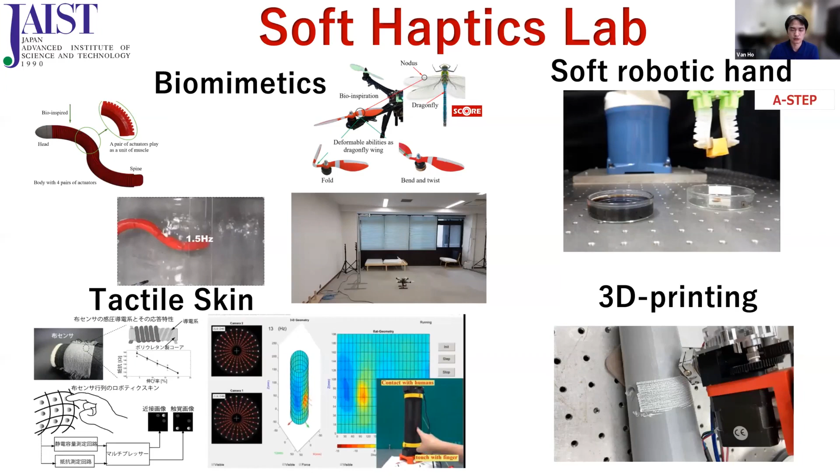And today, my focus will be on the morphological design of robotic hands, as you can see here. Regarding the design of robotic hands, up to now there are so many designs, which are not only efficient but also really interesting in terms of mechanical ideologies. So in our laboratory, we try to build on softness and then apply morphological design.

When you're talking about morphology, it should be related to the geometrical shape and also the measurement, right? But also when dealing with materials, you need to care about mechanical properties like Young's modulus, softness, Poisson's ratio, and so on. One more point that we also focus on is tribology, which focuses on the contact interface between the objects and the hand.

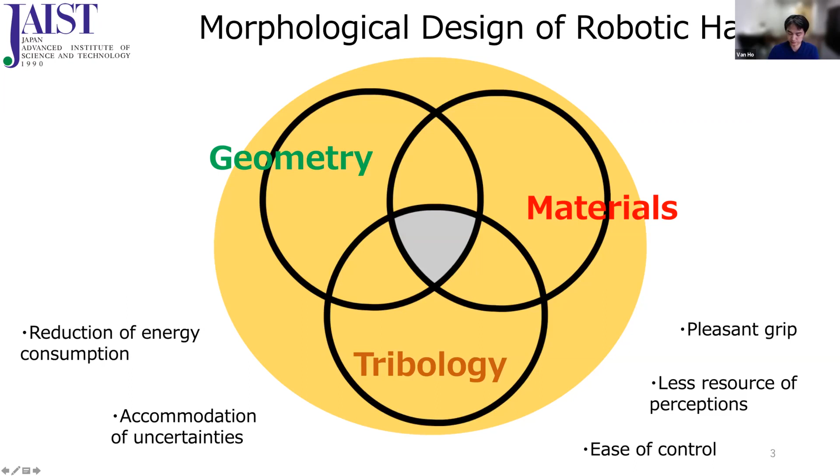So based on this ideology, our aim is to reduce the energy consumption in grasping and accommodate uncertainties without doing so much learning. We also want to generate a pleasant grip on the objects, using as few perception resources as possible. And finally, hopefully we can accomplish grasps with simple control regimes. So first, I will take a little time talking about the geometry and the material.

So how we use the morphology to design a robotic hand, and then I will focus on the tribology with the grasping of wet objects. So actually, even before the emergence of soft robotics, me and my previous supervisor, Professor Hirai, and his group were working quite a lot on how we can utilize the softness and also the shape of the fingertip for handling objects.

So here we apply a hemispherical fingertip like this. So what is special about this one? You can look into the simulation done by one of my previous colleagues in Hirai lab. You can see here, even if you have only a one DOF finger, with the softness and the round shape of the fingertip, you can change the posture of the grasped objects without any difficult effort.

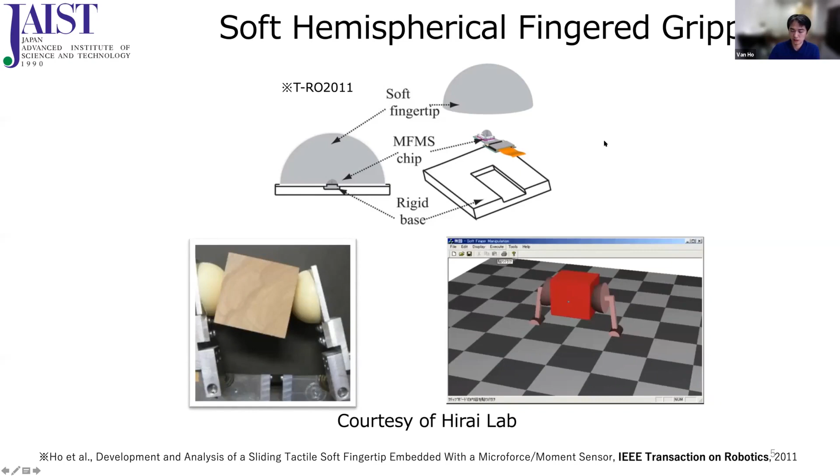So here in this research, we try to create some kind of tactile sensing by using a very small MEMS scale sensor like this. And this can detect the texture, slippage, and also the contact force as well. We also apply some kind of mechanical phenomenon into the design of the finger hand. For example, the pre-stretch. I believe you already heard about that.

So the idea is if you have a soft substrate and a quite stiff film, and before attaching one to each other, you give a pre-stress to the substrate, then after you attach the film, you can create some kind of curvature like this. If you apply an external force to this tip, there will be some stored energy that reacts to that.

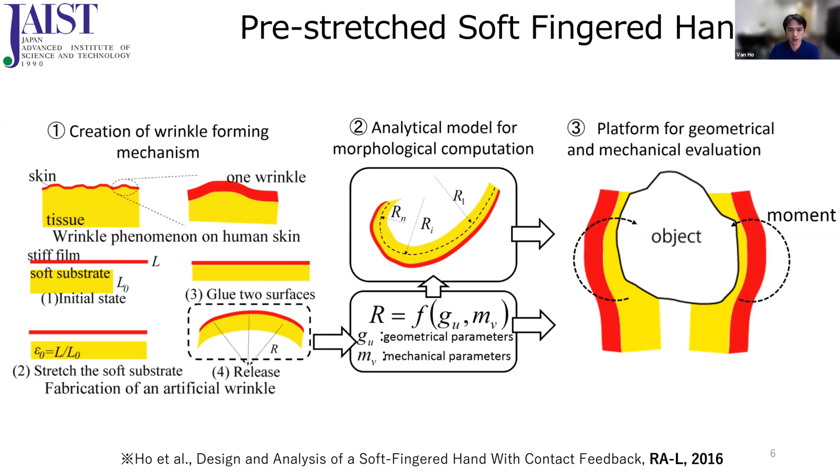So if you have some kind of morphological design for this structure, hopefully you can create fingers like this. And if you have an object in between, you don't need to give any kind of energy, because the stored energy will be converted to the grip force, so you can grip the object without consuming energy.

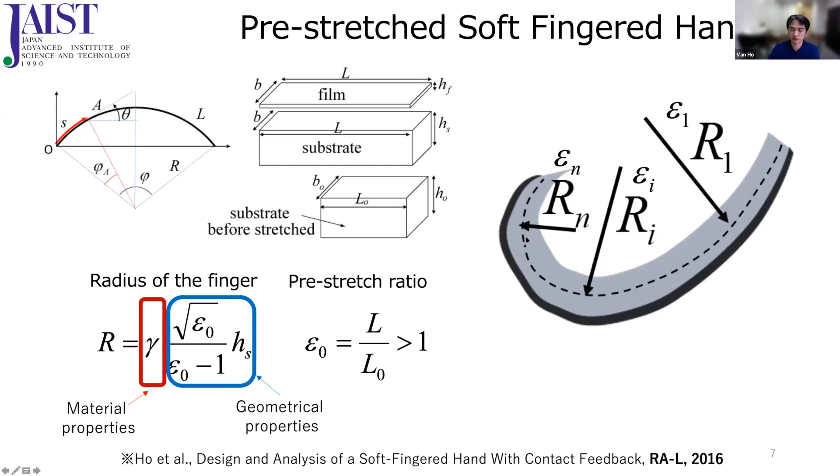And the other one is, here we use the idea of morphological design so that we can choose the curvatures of the fingertips by varying some material properties and the geometry properties like this. So during one setup, you can expect to create a human finger-like shape with different curvature along the finger, and also different levels of stored energy.

So based on this, we created a robot hand with soft fingers with pre-stored energy like this. We use a tendon and pulley only to open and release the fingertips. If you look into the consumed energy, you only consume energy when you open and release the finger. Once the object is within the fingers, you can manipulate without any further energy consumption. And because the finger is soft and not so constrained, you can grasp a wide range of objects like this.

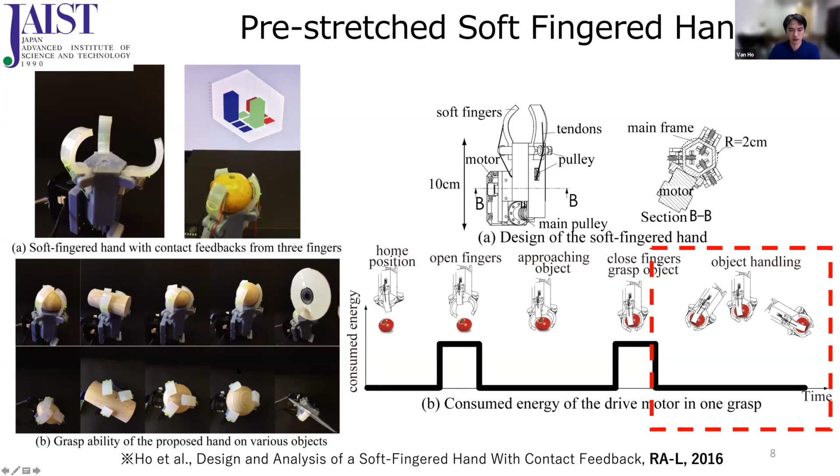We also try to give it tactile sensing by using our developed fabric sensor like this. So without using much of a learning approach, we can actually discriminate what kind of food objects the robot grabs based on measuring the capacitance generated through the fabric sensor. So with this simple design, you can save energy for grasping but also increase the dexterity of the grasp ability of the fingers.

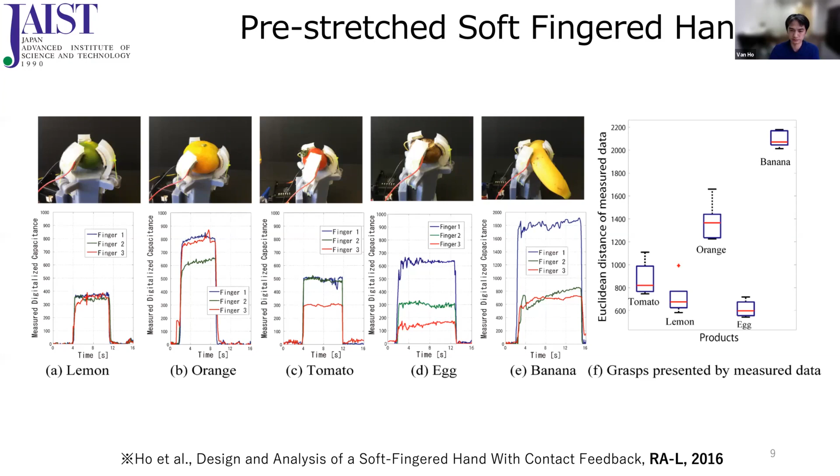So another kind of attempt is what I call grasping by wrapping. It's something similar to caging in grasping, but it's more than that, because if you can wrap the object entirely, you can expect to increase the graspability of your finger, of your hand.

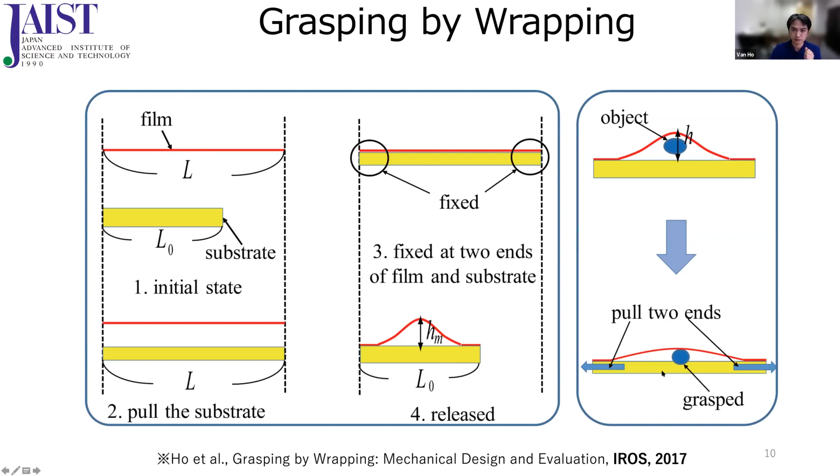So we also test the morphology of the curved film like this, based on the width of the hand. And we found that the length, the height of the curve shape is actually quite proportional to the width of the hand. So you can imagine that if you can control the width of the hand, you can actually change the grasp region of the hand.

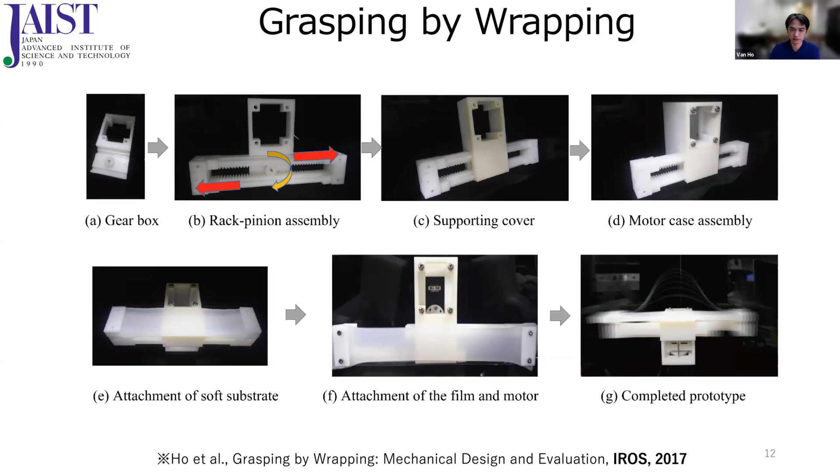So we use a very simple rack-pinion for this one. You can use one motor, and then you can create quite smoothly the shape of the film like that. Of course, you can use another kind of actuation, but this is the case. And you can see that if the object goes in between, you can simply grasp the object without so much complicated control and algorithm.

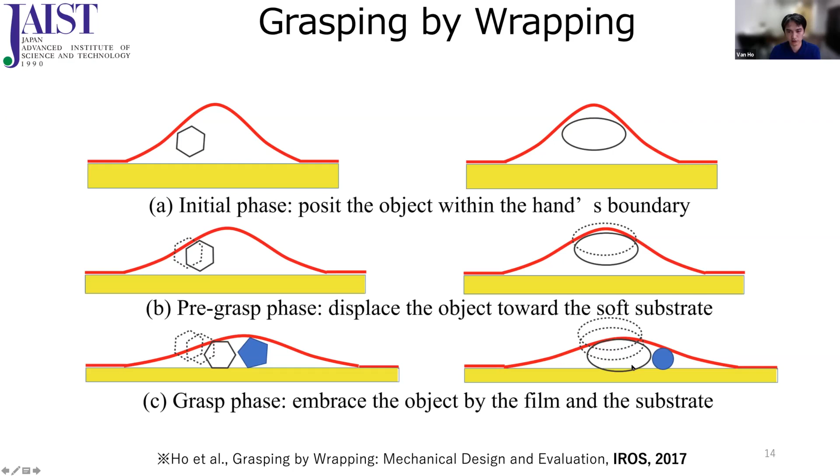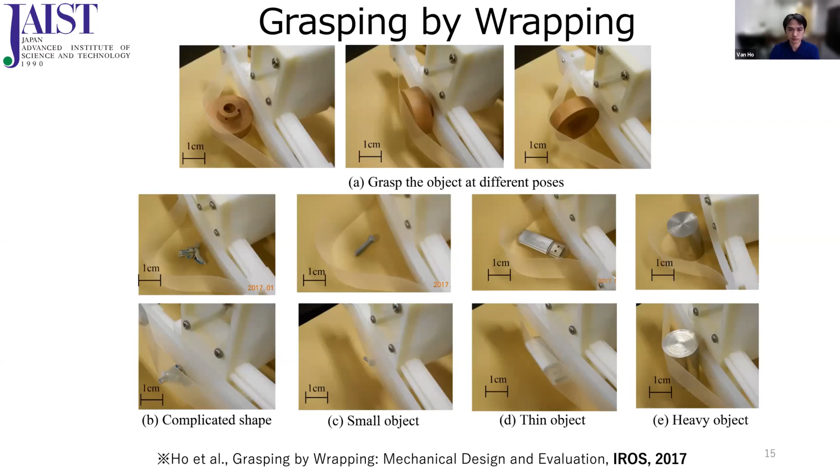And even if you have one or more, 2 or 3 objects, if they fall into this region, you can grasp the objects. So this is how the hand can grasp a variety of objects without so much attempt of control.

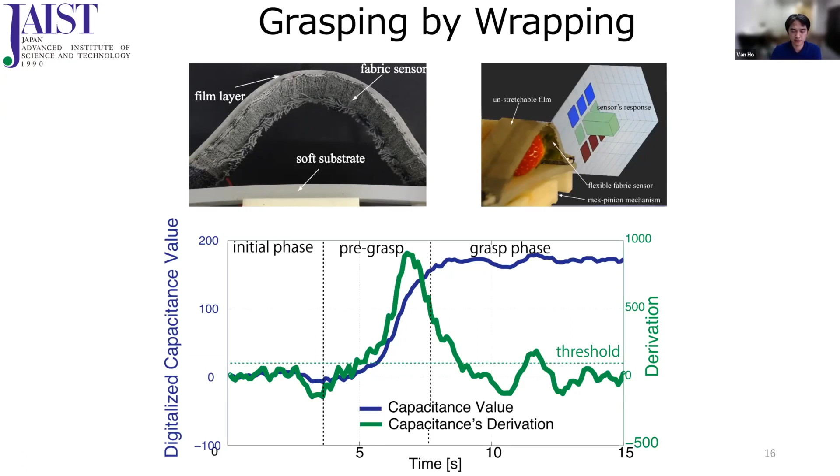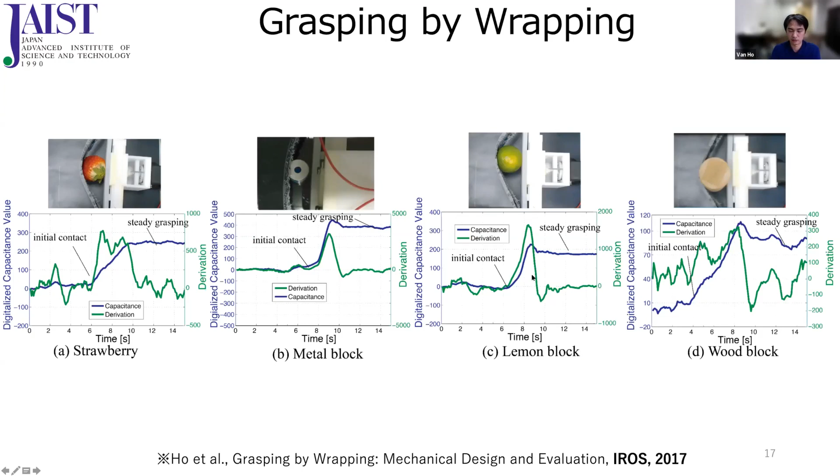And also, we try to give some kind of sensing to this hand by using a fabric sensor like this. And we find that the initial phase, the pre-grasp and grasp phases are quite different from each other. So we can actually discriminate the many phases of grasp by using the measurement of the capacitance of the fabric sensor. For example, we have many kinds of fragile objects like this, but based on the measurement of the capacitance, we can grasp these objects quite safely.

So these are some examples showing how we use the geometry and the materials for designing novel robotic hands for saving consumption and also increasing simplicity. So next, I will talk about tribology, which I think is very important for understanding the contact interface between the hand and the object.

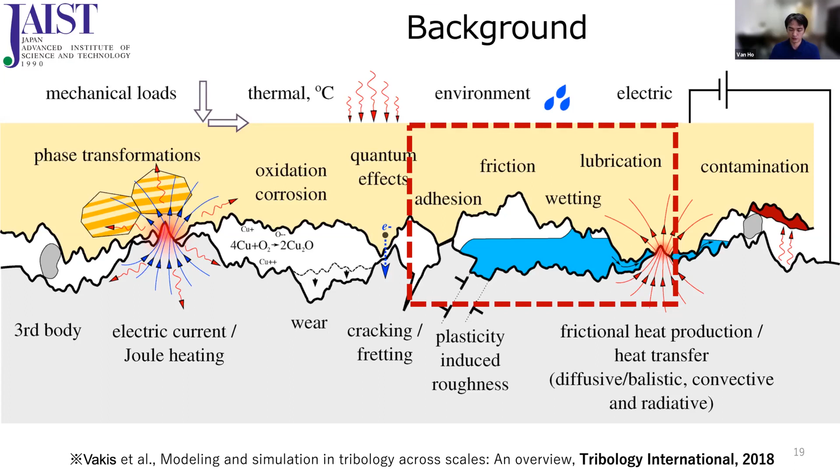What I'm interested in among these tribological phenomena, and I think it's important for grasping, is actually within this red square here. You can see adhesion, friction, wetting, and lubrication. It's actually very important. And if you can somehow control these phenomena for the robotic hand and the objects, you can expect to enhance the graspability of your robotic hand. So regarding that, we have some examples in the literature.

For example, we have the Gecko hand, which has many bristles on the surface to increase the contact and the adhesion, so that it can grasp very heavy objects. But this only applies to the dry condition. Another case is like a suction cup, but they pump water onto the surface so that the air will not leak. The lubrication here actually helps the suction to grip objects even with many convex and concave surfaces or many holes. So for suction cups, it's very efficient.

The other case is electroadhesion. You apply a very high voltage, and you can grip the objects without so much applied force. But here you have to use very high voltage, which is not always preferable. And this is another research case of ours for the friction modulation between the grasped objects and the hand, by changing the shape and also the inner pressure of the finger like this.

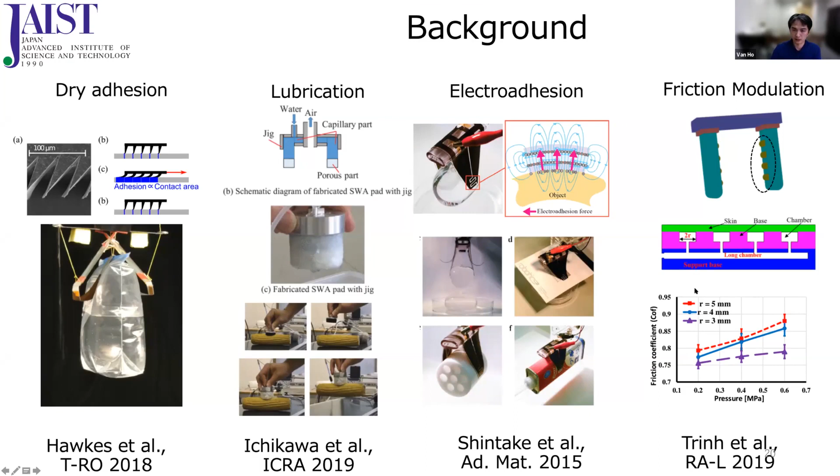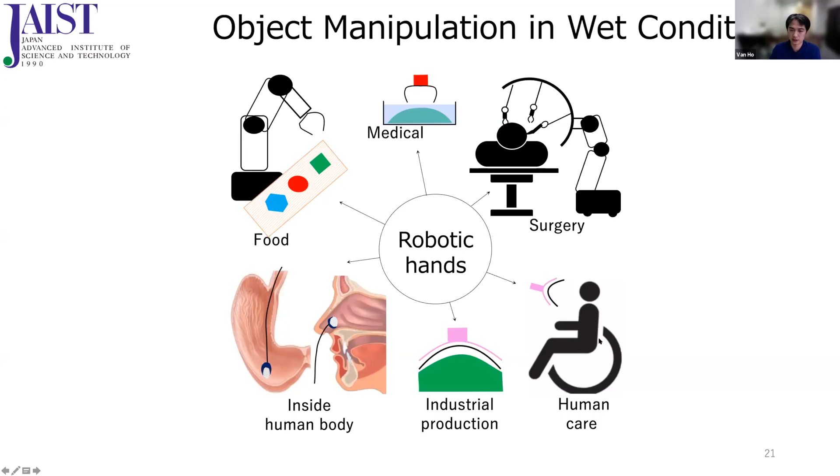So here, I have quite a motivation in manipulating wet objects or objects in wet conditions, because if you consider normal cases of our daily life and also medical and industry, there are many scenarios where you have to deal with wet objects, like food, or when you have to go inside the human body with blood or something like that, and also some industrial phases that deal with wet adhesion, and also for human care.

So let's take a look a bit at wet adhesion. When does wet adhesion appear? It's when there's contact between two substrates, and we have a very thin water film inside. Usually, the wet adhesion force can be estimated by the Laplace force caused by the shape or curvature or the contact angle, and also the Laplace pressure inside.

And also we have the force caused by the surface tensions, and also the viscosity force caused by the liquid film between them, and of course it can cause adhesion both in normal and tangential cases like this.

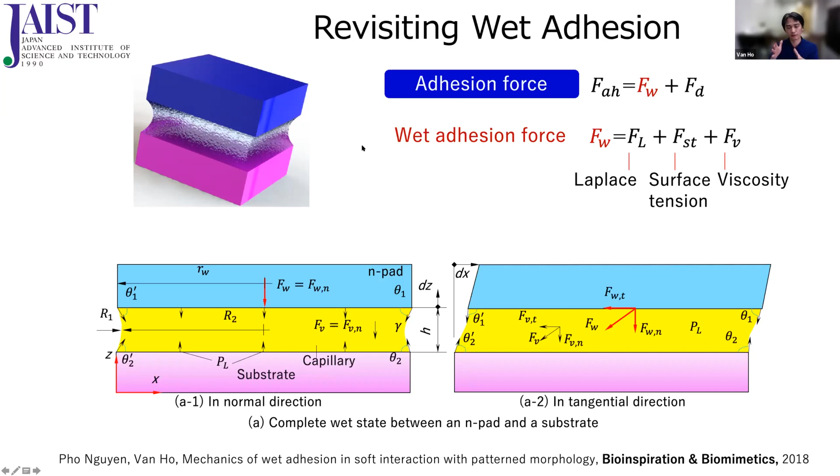But if you have a very flat one, you only have one film. But if you look into the tree frog finger toes, they actually have many grooves like this. When you have many grooves, you can expect the number of capillary actions to increase, so when you have more capillary actions, you can expect more adhesion force. That's why instead of a very flat surface, if you divide it into many tiny cells with many grooves, many channels like this, you can actually increase the adhesion force.

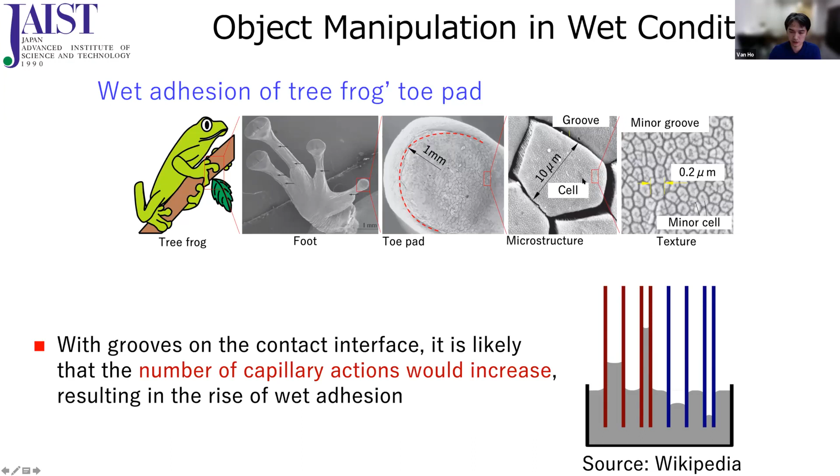So based on that, we designed an interface like this. For example, it's a 6 by 6 millimeter surface with 3,600 cells, and we have very small grooves or channels like that, with a depth of 44 micrometers and a width of about 15 micrometers. The design of the width and the height is very important as well.

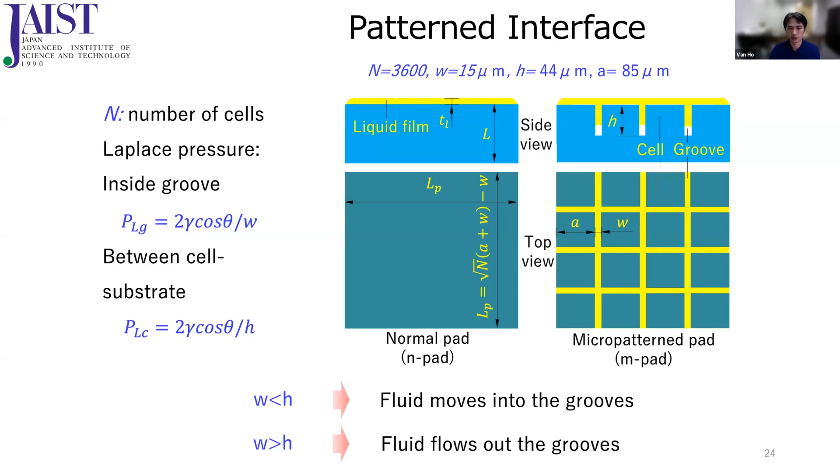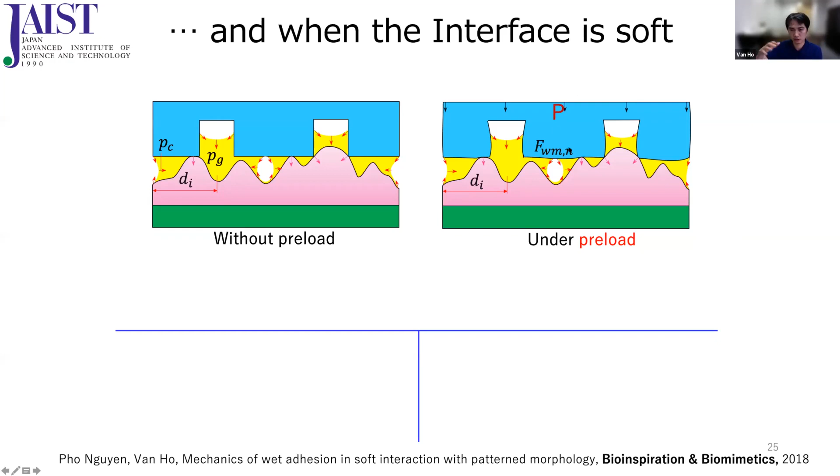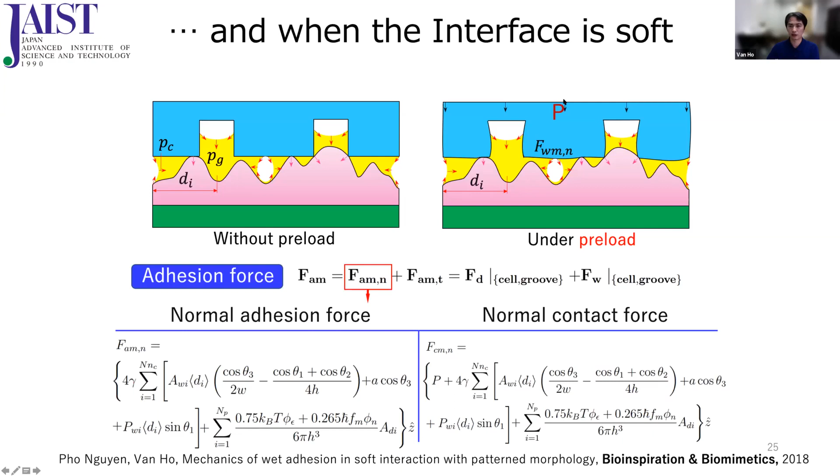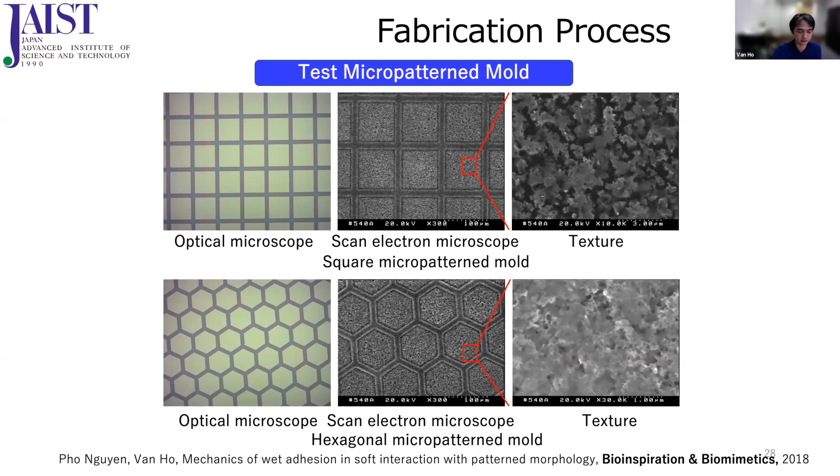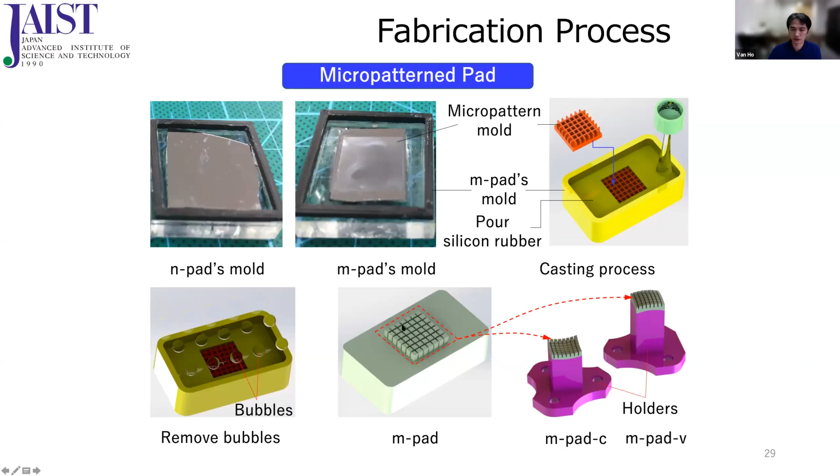First we have to make the mold, using electron beam lithography as you can see here. Then you can pour the silicone into that, and after that create a part with the micro structures on it. Of course, you can change the size and shape based on what you design, but basically here we use a square shape like this.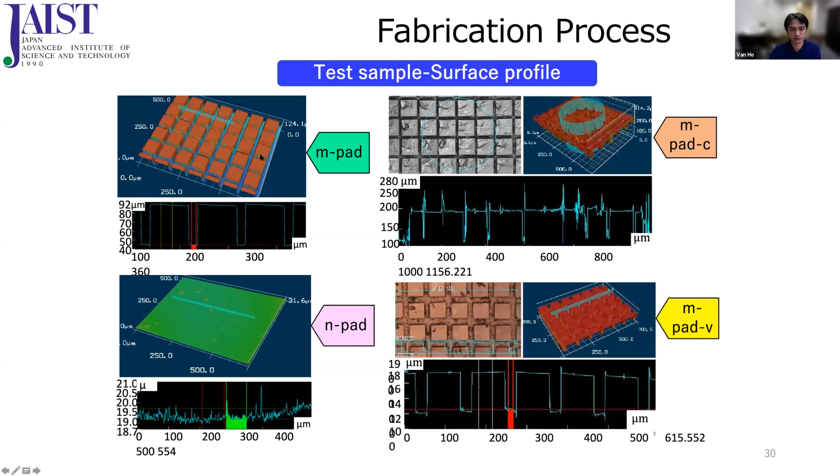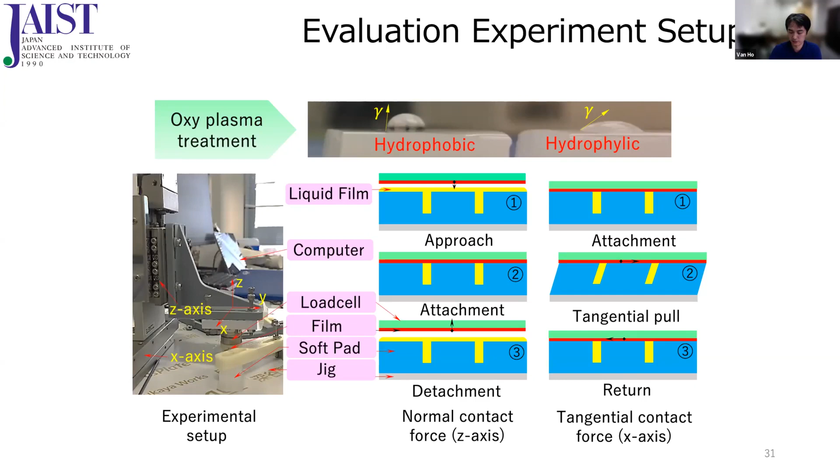We tried to evaluate if the force actually increases when you introduce the micro pattern, using an experiment setup like this. Roughly we can conclude that with the micro pattern pad, the normal force can increase by up to 1.2 to mostly 2 folds compared to the normal pad. This conclusion is also applicable for the tangential force, but the ratio is a bit smaller.

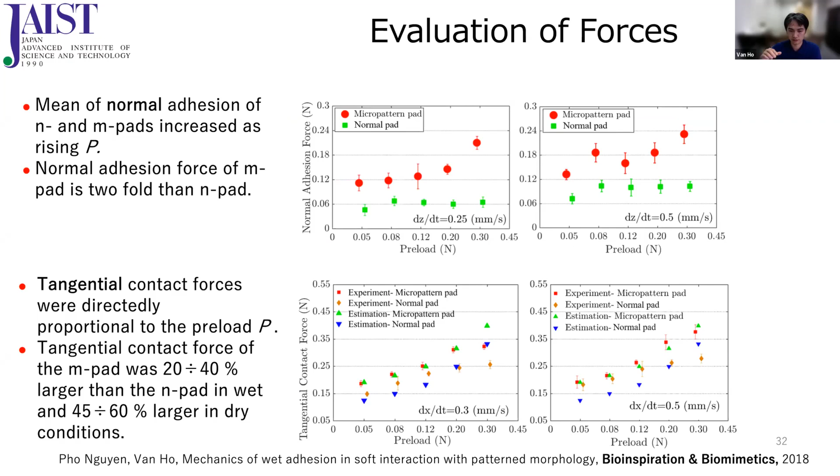If you change the preloads, which is like a squeeze force, the generated force also changes. The tangential force, as you can see here, for the micro pattern pad is much more than for the normal pad.

We have an application for grasping wet or fragile objects, as you can see here. First is the handling of contact lenses. In Japan, a lot of people use contact lenses on their eyes, but for some disabled people, it's very difficult to grasp and take the lens from the case and attach it to the eyes.

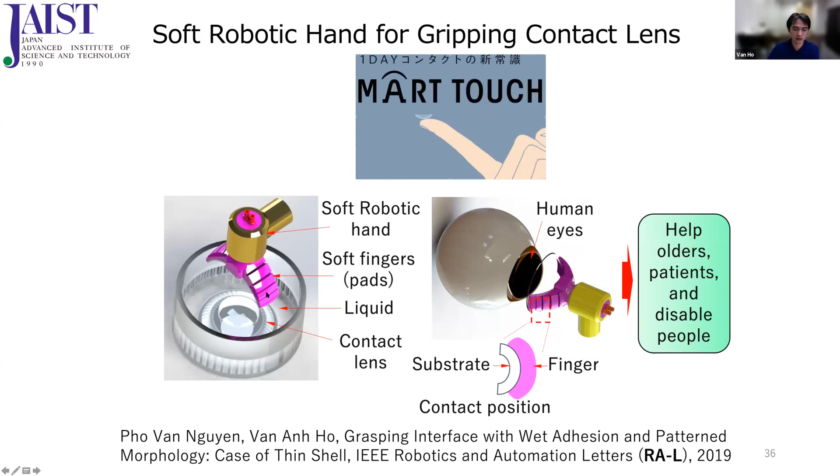So we thought, maybe we can show a potential case for that, using the micro pattern pad to grip the lens in the case, which is inside liquid, and attach it to the eyes, because the finger is shaped soft, so maybe it's also safe for humans.

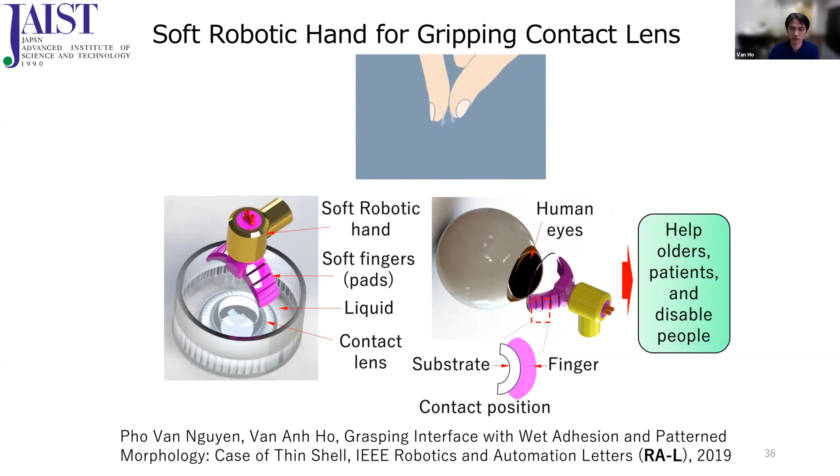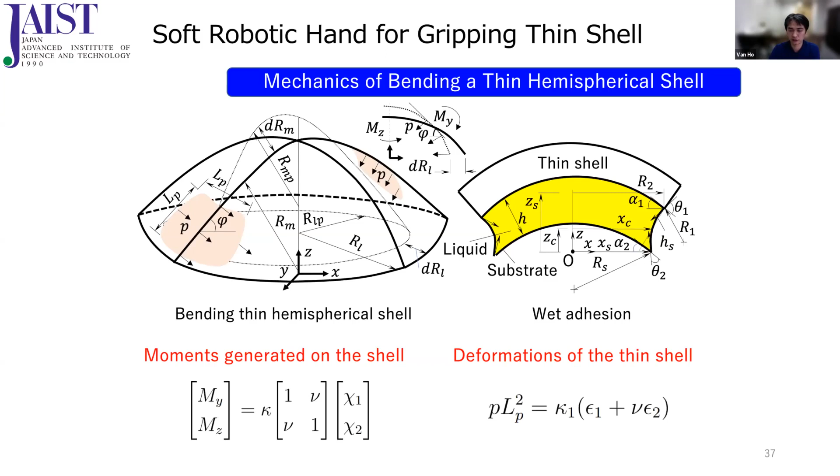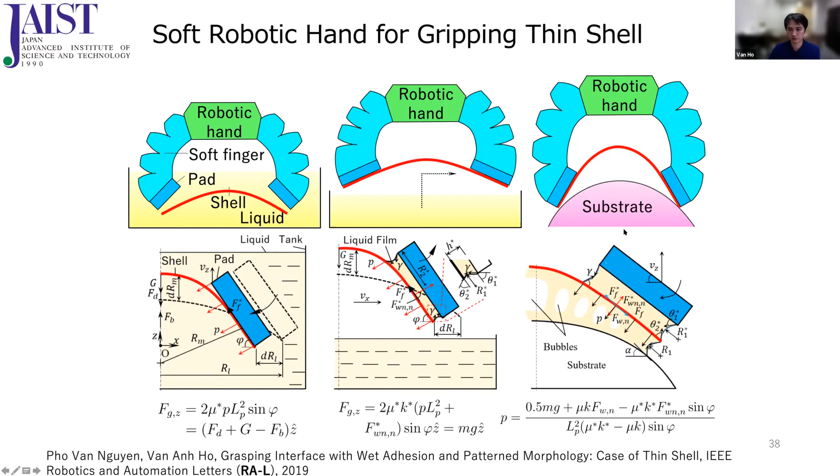We did some analytical work to calculate the deformation of the film and the thin shell, and this is how we modeled the adhesion in different scenarios, for example, shell inside the liquid, outside, and on the substrates as well. This is an example, you can see here.

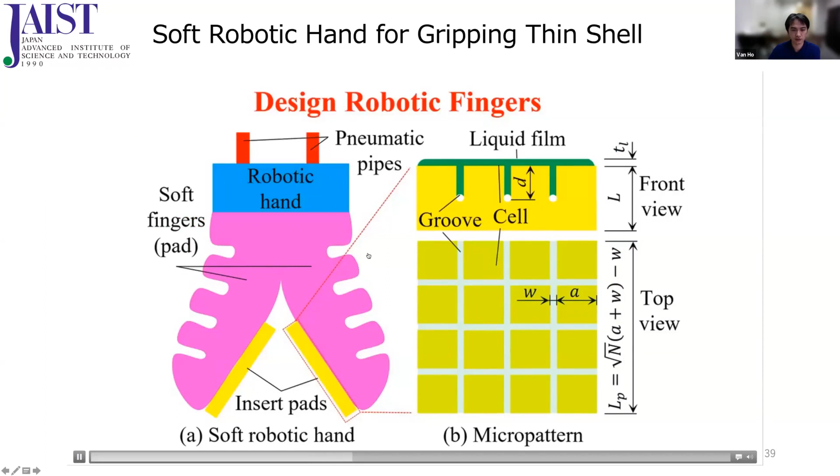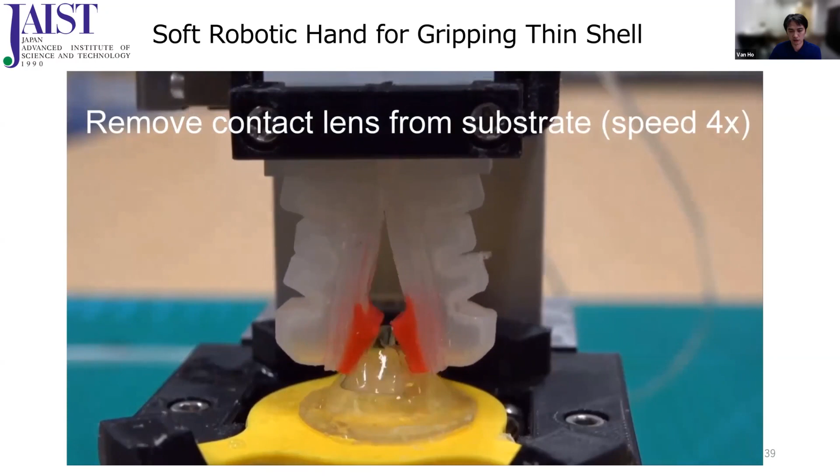This is the hand that we developed, very simple, right? So here's a scenario when the object is grabbed. As you can see, after grabbing, even if you release, it's still attached to the finger. This is how it attaches to the substrate, and of course, after that, how you can remove the contact lens safely from the substrate.

Another application we thought of is how to create stable grasping of wet and deformable objects, for example, imagine you want to grasp tofu from sauce like this.

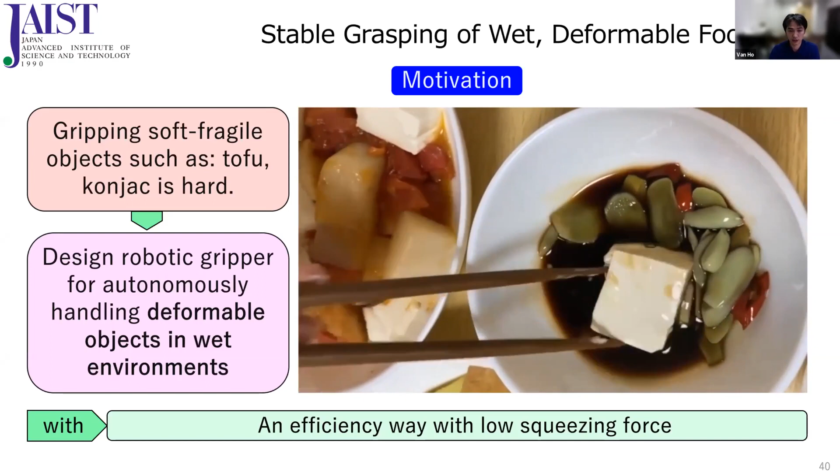So even for humans, this is very difficult. So what if you can apply that to this case using a robotic hand but with very low squeezing force?

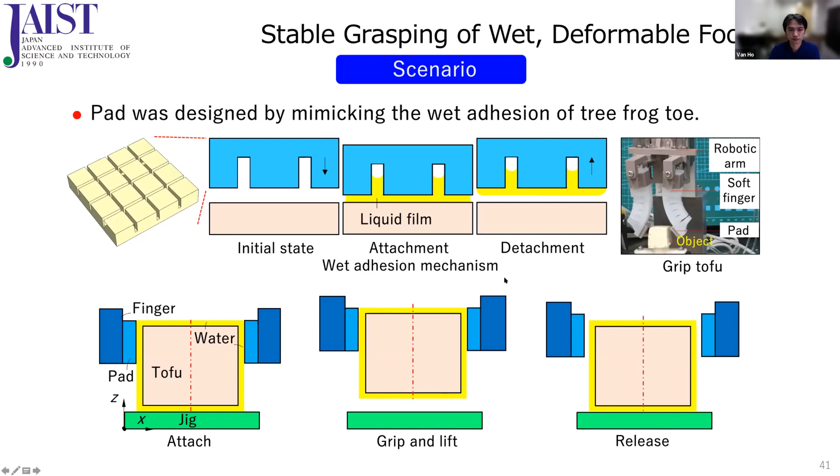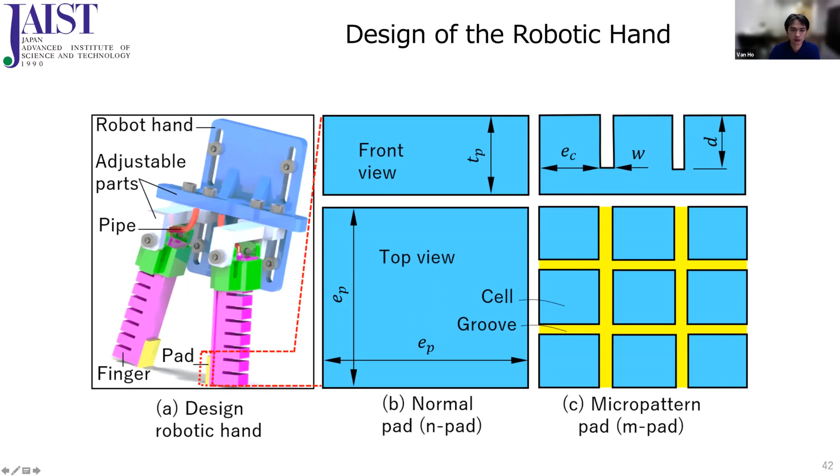So here is how we try to deal with this problem. We try to calculate how much force it can apply to grip the tofu, and also how much the tofu deforms, comparing the micro pattern pad and the normal pad. This is a normal pad without any structures, and this is a micro pattern pad, similar to what you've seen before. This is how we try to model it, but since we don't have much time, you can look into our paper in IROS last year.

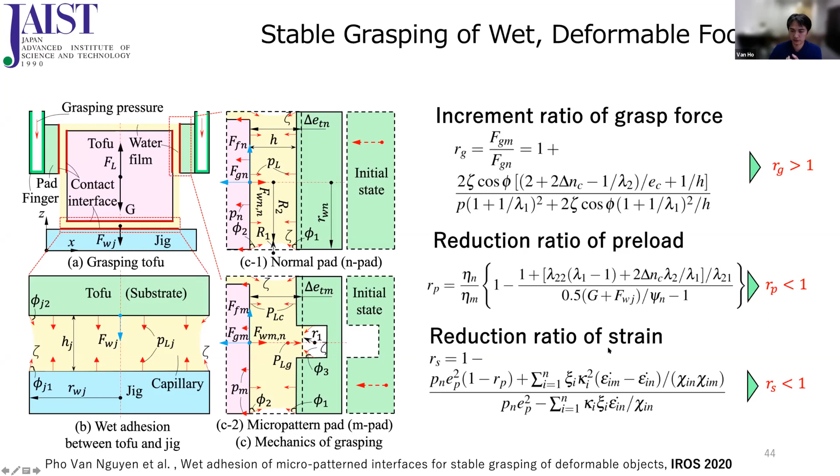The conclusion is that with the micro pattern, it actually increases the grasp force, due to the adhesion inside, and actually reduces the preload, and also the ratio of strain applied to the tofu.

So this is how we set up the evaluation experiment. This case grabs the object with the normal pad, and this grabs the object with the microstructure pad. Here is how we evaluate the grasping pressure and the normal preload. You can see that you can reduce quite a lot the load, the grip force applied to the tofu, when you use a micro pattern pad.

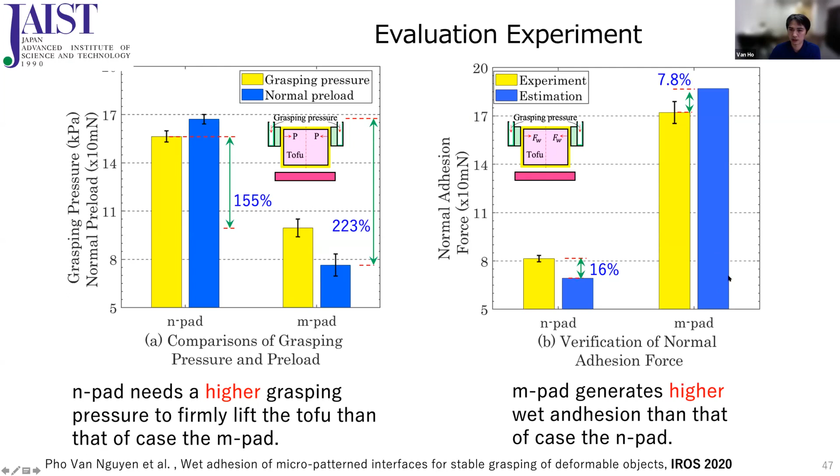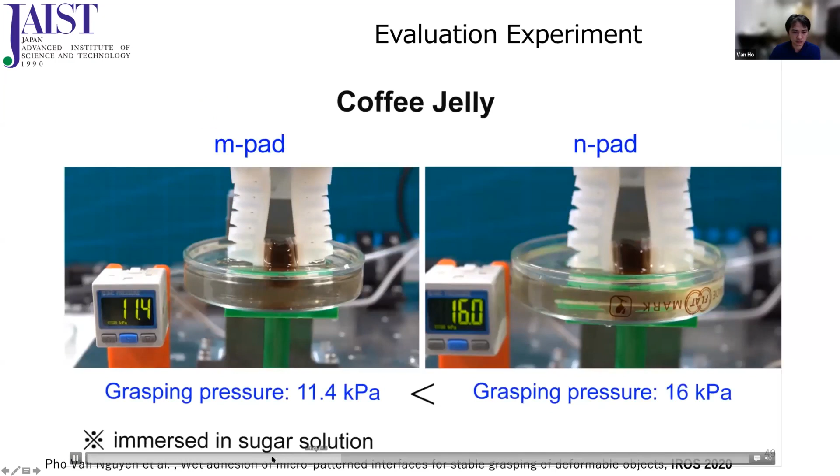Okay, so this is the video you can take a look at. We actually use a different kind of setup - okay sorry, let me start from here. This is how we measure the force.

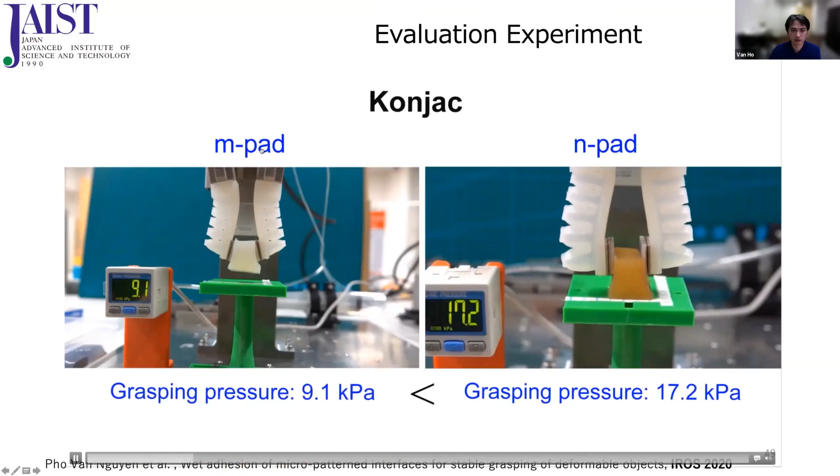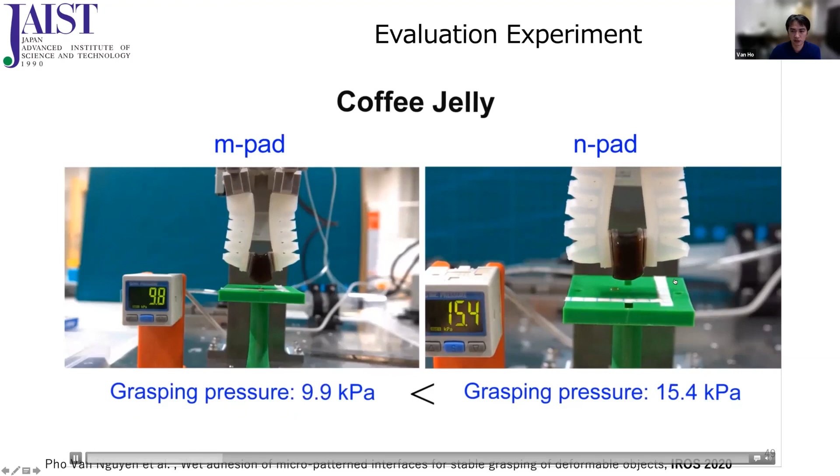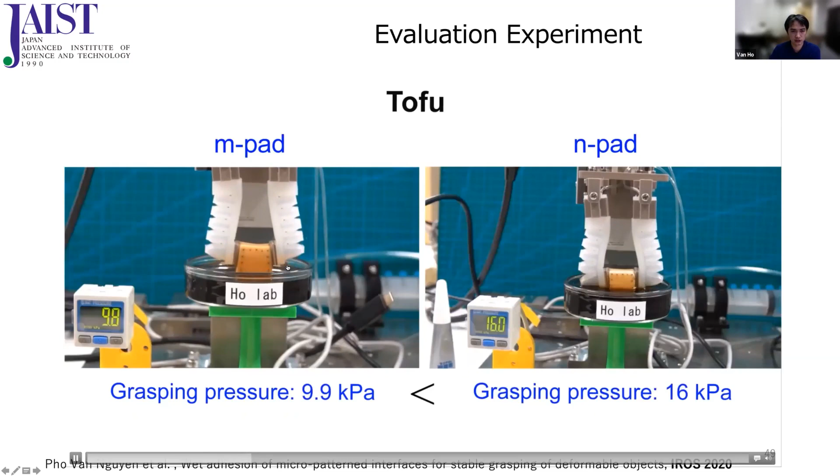Here's the inner pressure - this is the microstructure part, and this is the normal part. You can see the inner pressure for gripping the objects in this case is smaller than the normal part. We also test with cases when the object is inside a liquid, such as soy sauce. You can see here the applied pressure, inner pressure of the fingertip. In our case, you can see that you can grasp the object with less inner pressure.

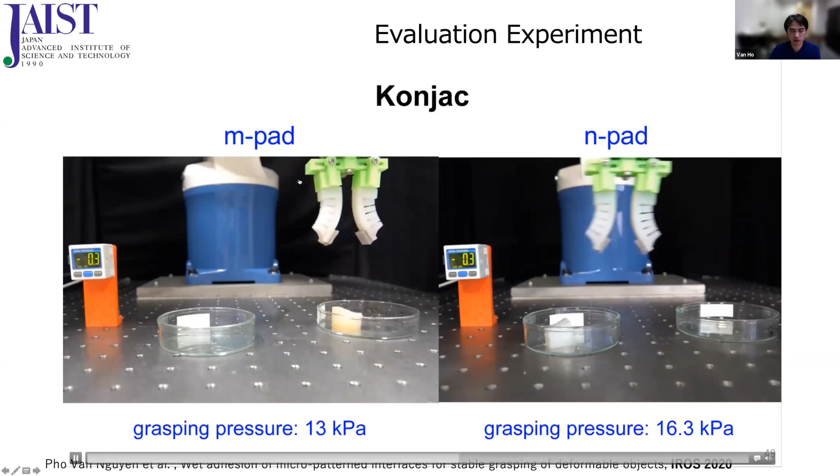We also try to apply this into the robotics system, and you can see the difference between the microstructure part and the normal part like that. So in most of the cases, the microstructure parts can grasp the object with less force and also more stably compared to the normal part.

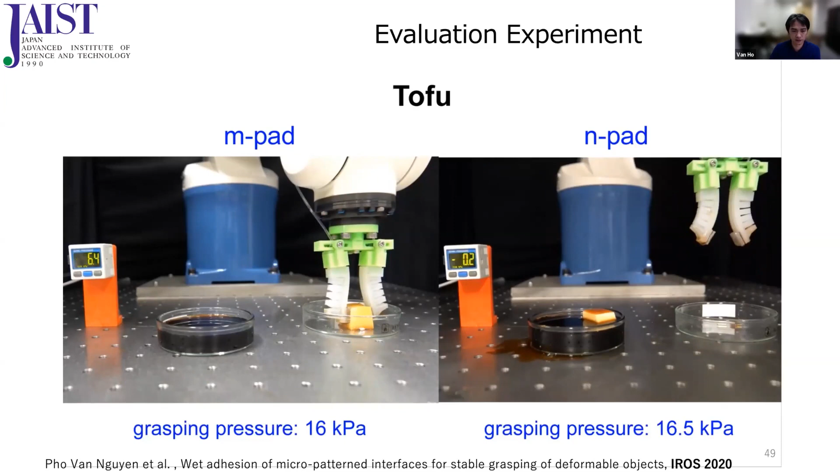Another question is, how about when you grasp from inside the liquid? So in this case, our developed one can also perform a bit better compared to the normal part.

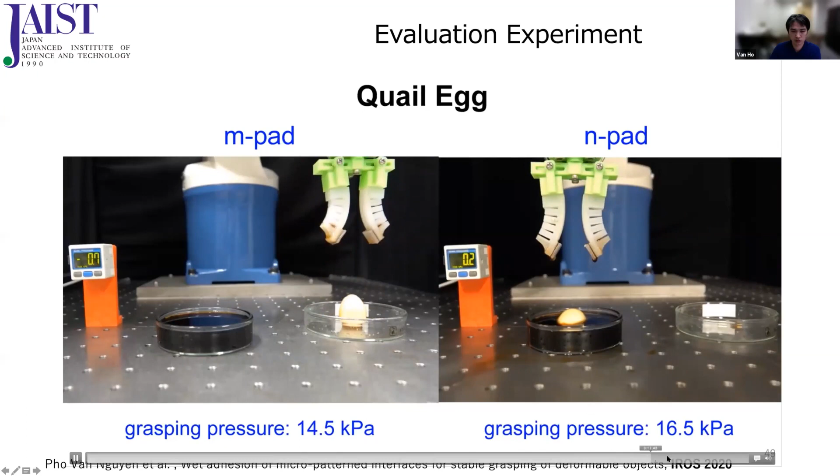This is the soy sauce, and we also tried with another kind of solution, which I think is a sugar solution.

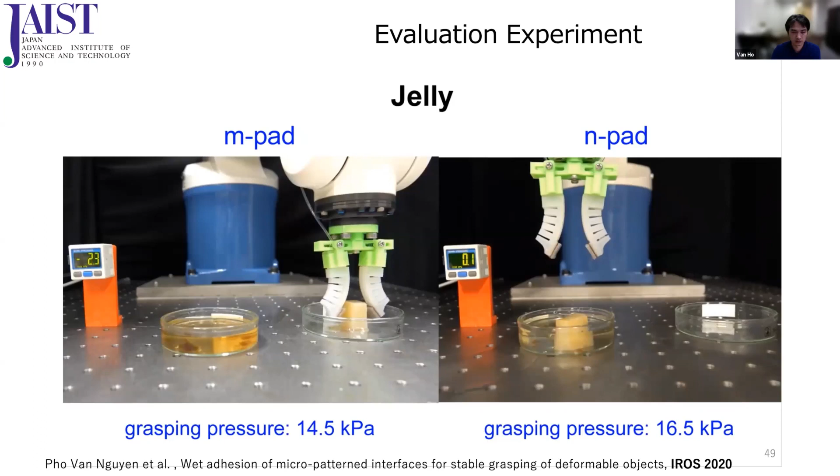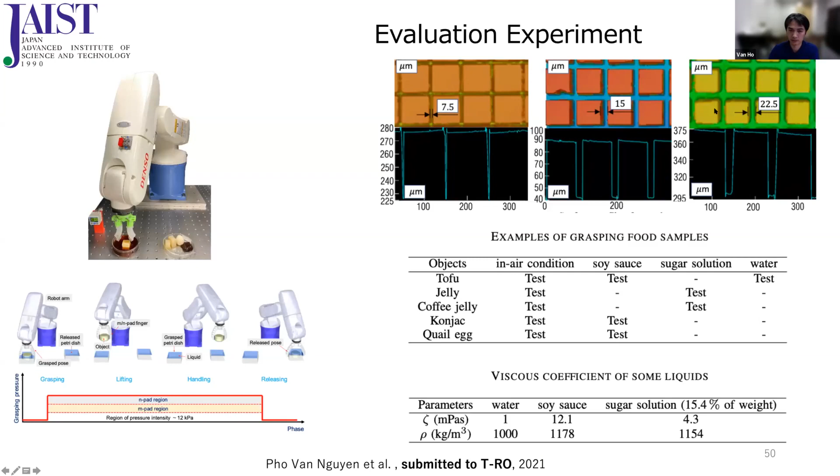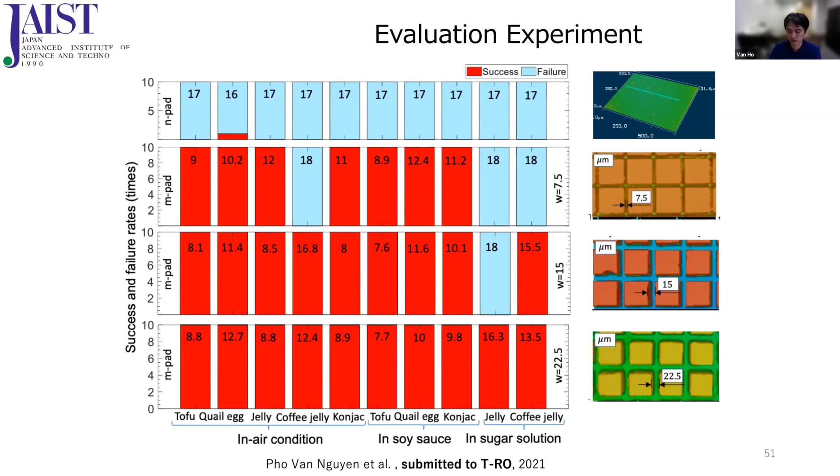And we found that, first compared to the normal pad without any structures - the blues indicate failure and the red indicates success. We tried 10 times and counted the successful times, and you can see that for the microstructure pad, it worked quite well. But of course, with different structures of the micro pads, results were quite different from each other. Some are very good for a specific food object, and some are not.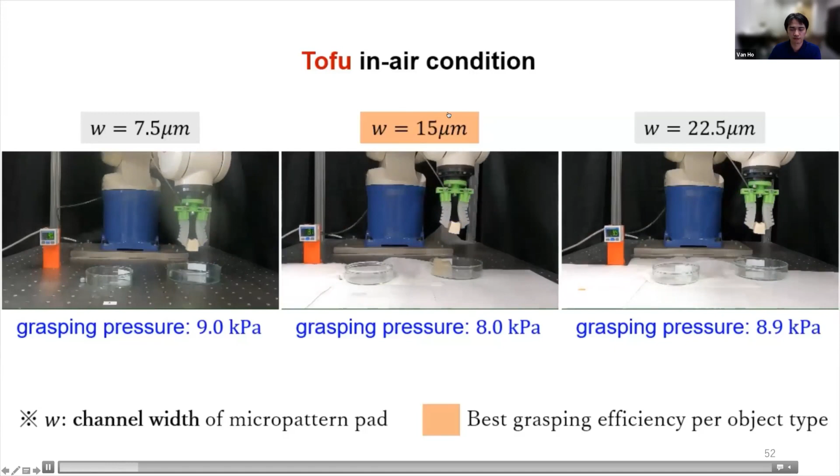Let me show this. For example, in the tofu, we found that a width of 15 micrometers actually outperformed the others. But for another case, a very soft object, the width of 22 micrometers actually outperformed compared to the other ones.

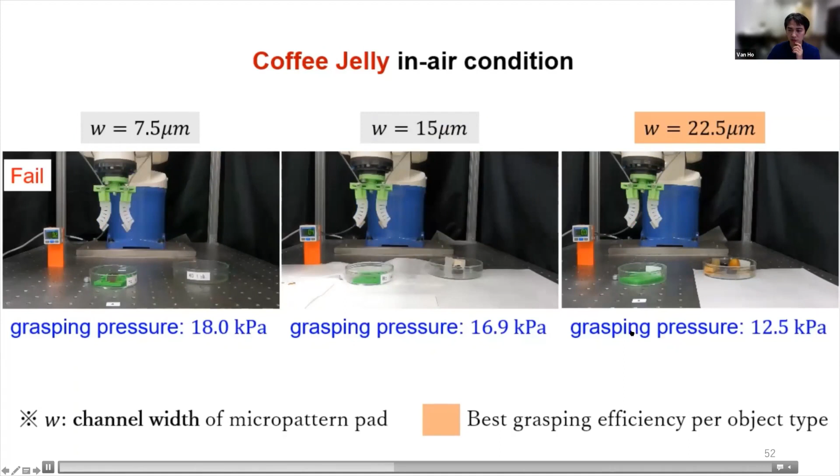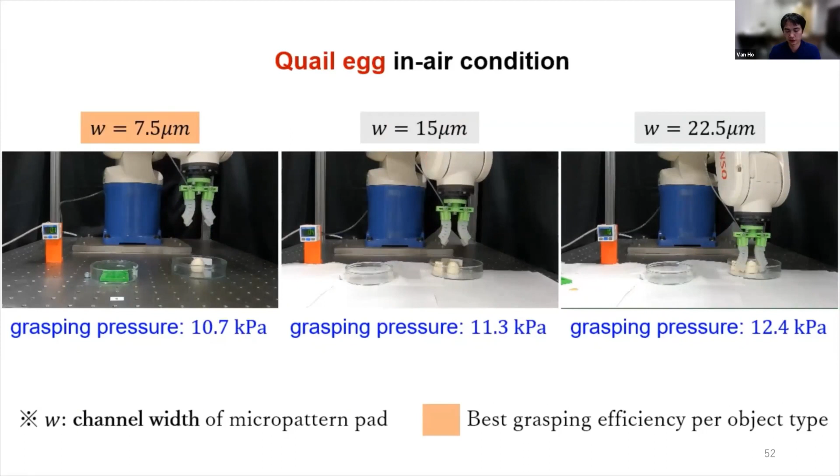In that case it worked okay, but we also compared the grasping pressure, and found there's some difference among them. So the conclusion here is that if you change the morphological design and the tribological characteristics of your finger, you can expect to achieve enhancements in grasping many kinds of objects.

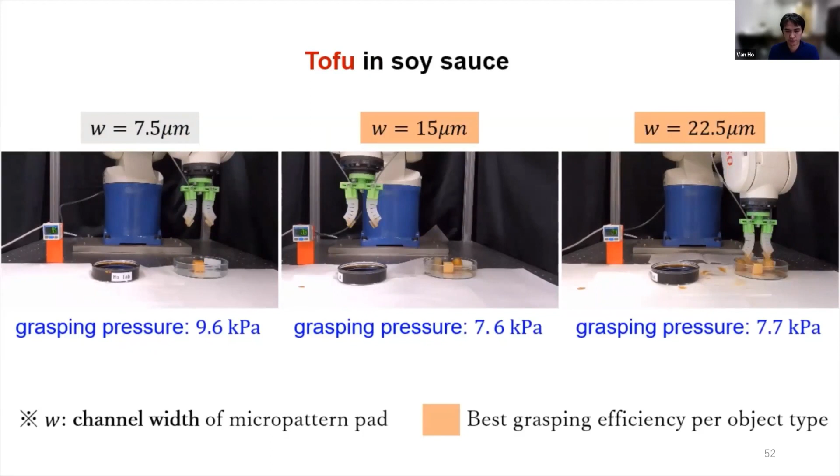For example, some very difficult to handle objects like food, or deformable, fragile objects like this. And with that, I would like to conclude my talk. I would like to thank our team and our funding agencies. That's all - if you have questions, feel free to ask. Thank you.